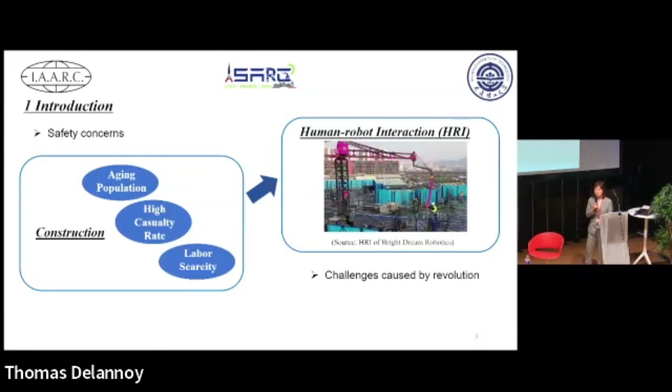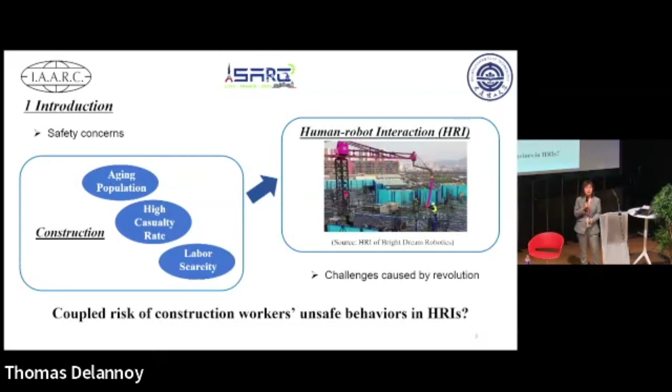But there are also new challenges caused by these revolutions. So we want to assess the coupled risk of construction workers' unsafe behaviors in HRIs in our study. We also went back to look at previous work on the identification of independent risks and assessment of coupled risks. For the identification of independent risks in HRIs, we found they did not consider the coupled effects of the risks. But the coupled risks works did not consider the HRI aspect. So this is our motivation for the study.

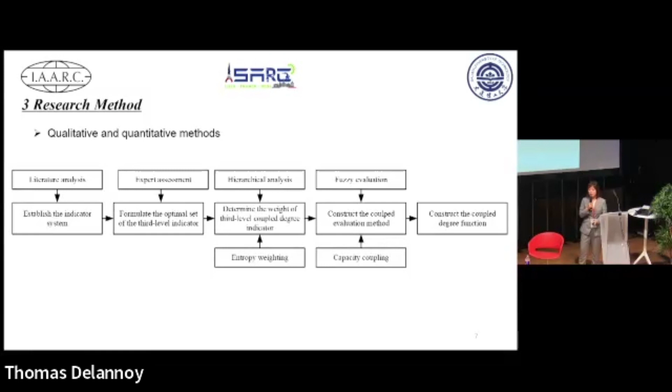So we used both qualitative and quantitative methods in our study. We use literature analysis to establish the indicator system and gather the experts' opinions to formulate the optimal set of the third level indicator systems. Then we use the hierarchical analysis and the fuzzy evaluation methods to construct the coupled degree function.

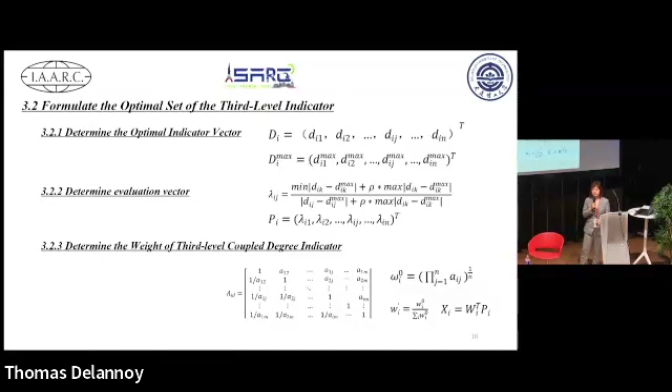So firstly, we collected both review studies and empirical research to construct the three-level indicator systems. Here are the results we contribute. Compared to traditional risk analysis, we have the first level indicator of the robot, and we have different sub-indicators in this level. Then we use the optimal indicator vector of both the influence and the possibility of each indicator to determine the evaluation vector and the weight of third level coupled degree indicators. Then we calculate the coupled degree function.

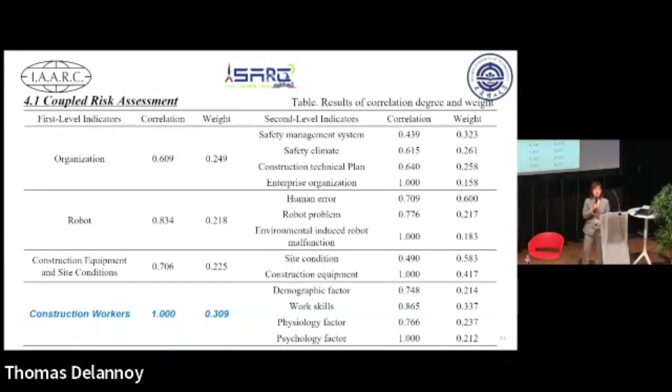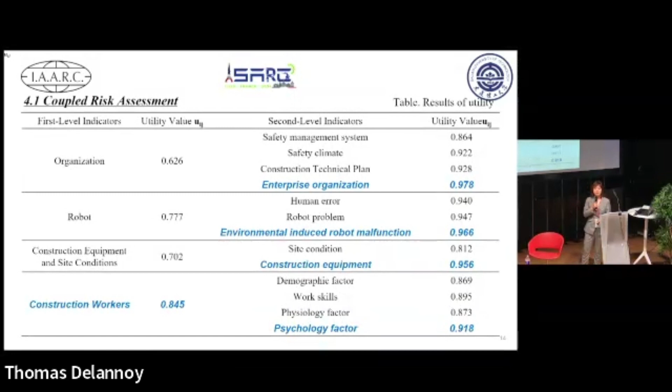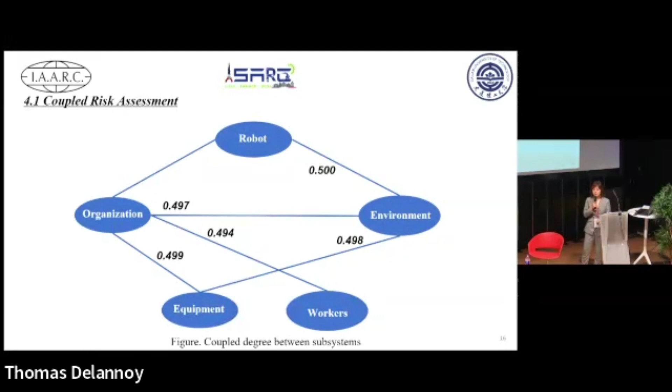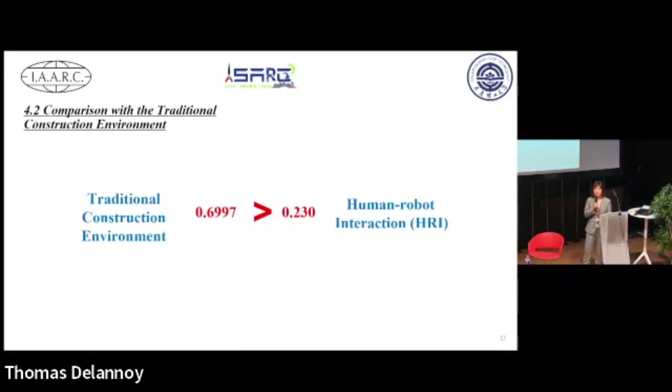Then we want to compare the traditional coupled degree with the coupled degree in HRI. So we found similar work in the traditional construction environment. We found that the coupled degree in HRIs is lower than the traditional environment. Our explanation is that the presence of the robot reduces the correlation or the coupled relationships between other factors and makes the environment safer.

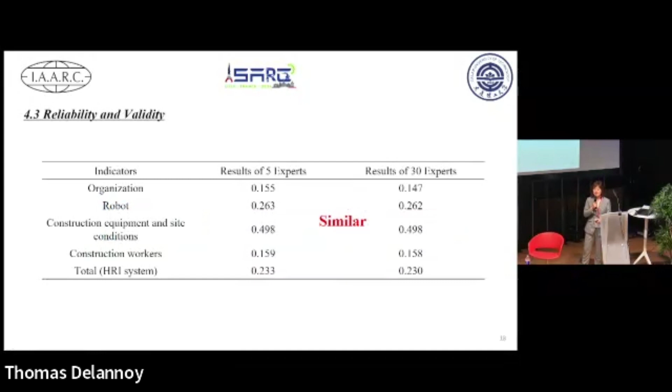For the reliability and validity, since our sample is small, we compared the results of different samples of experts and they have similar results. So we think our results are convincing. And in conclusion, we established an indicator system to assess the coupled safety risks. And we think the robot related factors should be considered in the design and implementation phase. And the HRI risk systems could be the foundation of new safety management documents, training, and inspections.

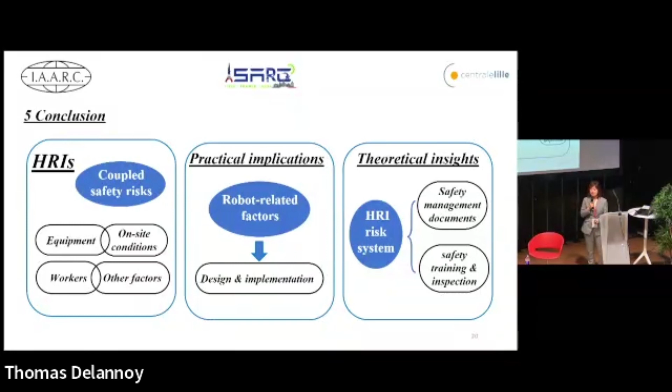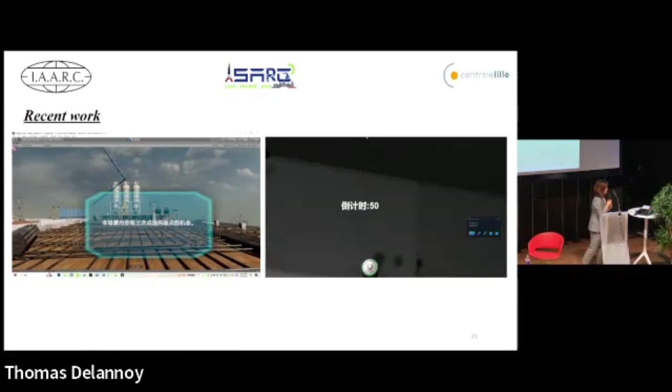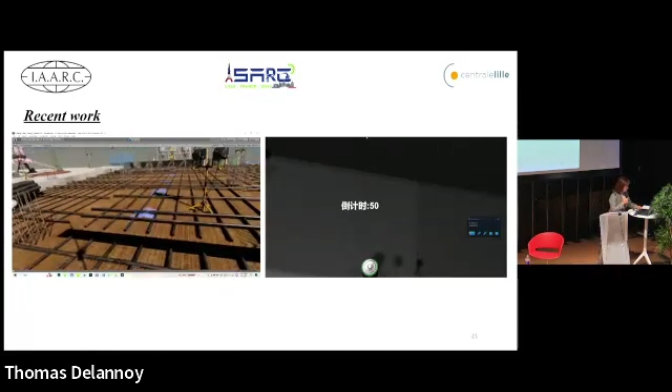And I want to show some new works of our team. We want to have some VR-based experiments and studies on human-robot interaction. So the first video is about the tendencies of workers. So this one, the yellow one, is a robot similar to a real robot in China. And the second research is about human-robot trust with collision in the tasks.